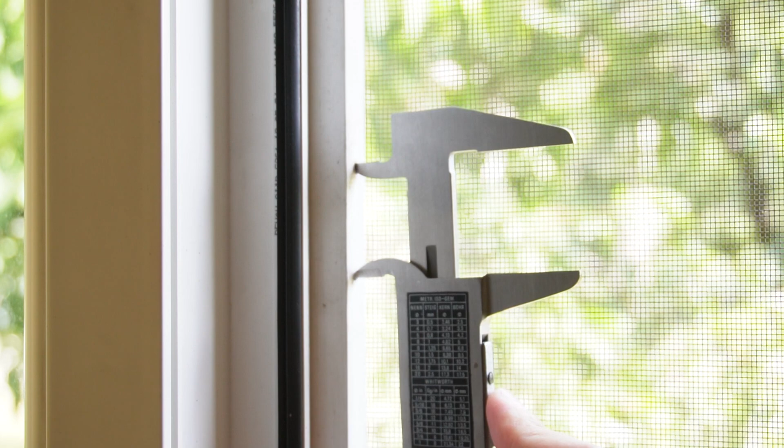First I will measure the distance from the highest to the lowest point of each hole. Next I will measure the diameter of the hole. I will make an approximate measurement for the size of the handle. I can barely see the marks where the old one has been.

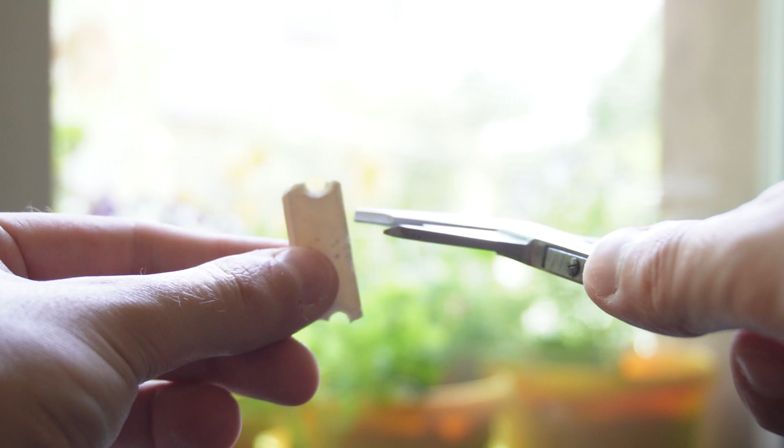Finally, I will measure the depth, or in other words, the width of the metal profile. I will use the broken piece to measure the thickness of the plastic.

Now let's open FreeCAD. Choose Part Design from the drop-down menu, then create a new document, a new body and a new sketch. I will select the XZ plane. Click on the polyline tool and make an L-shaped object as shown in the video. Try to make all sides either horizontal or vertical.

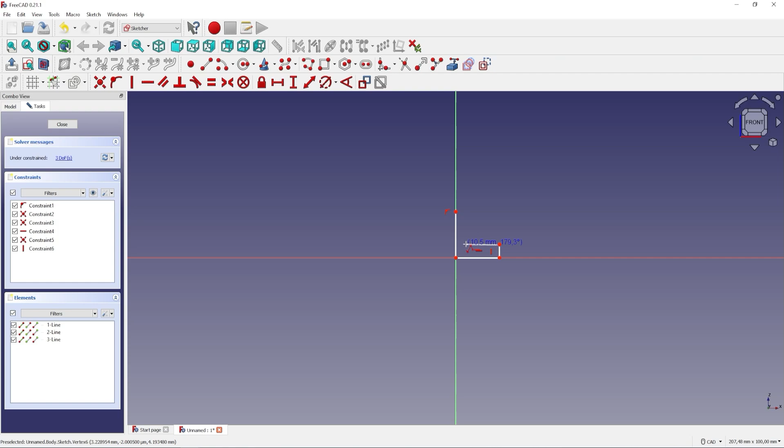I have to constrain only the top line horizontally. Now I will set the dimensions. The vertical line will be the handle and I will make it 25 mm. The horizontal line will be the side that is attached to the frame and I will set it to 18 mm.

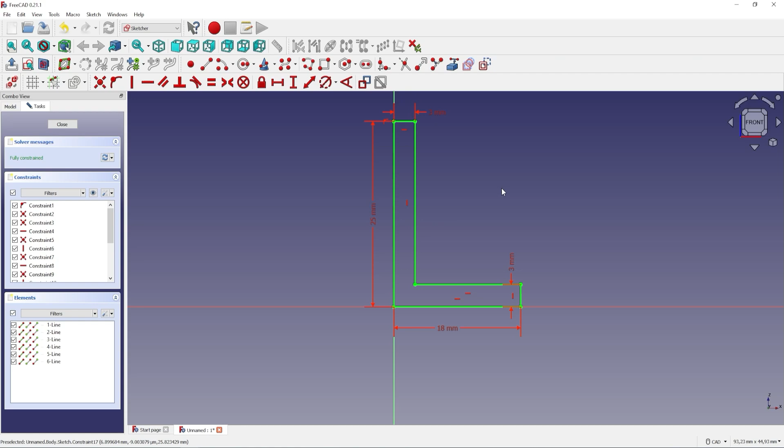I need the thickness of the handle to be 3 mm, so I have to set the other two lines to 3 mm. Now the sketch is fully constrained and I can close it. Click on Pad and set the length of the handle. In my case it should be 67 mm. Then click on OK.

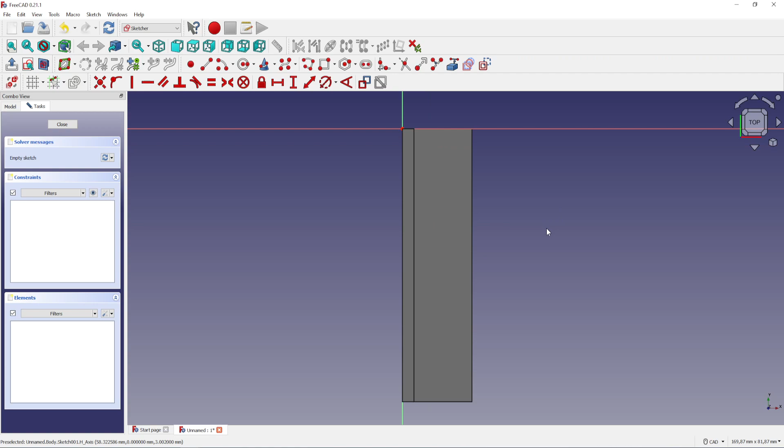Select the face that needs to have the mounting holes and create a new sketch. I will rotate it so the handle is on the left. First I will make two circles for the holes. Now I will select both circles and set their diameter to 3 mm.

I will create one point on each of the circles as shown in the video. Select the newly created points and the center points of the circles and constrain them vertically. It should look like this. This will allow me to set the vertical distance between the ends of the holes. In my case it is 37 mm.

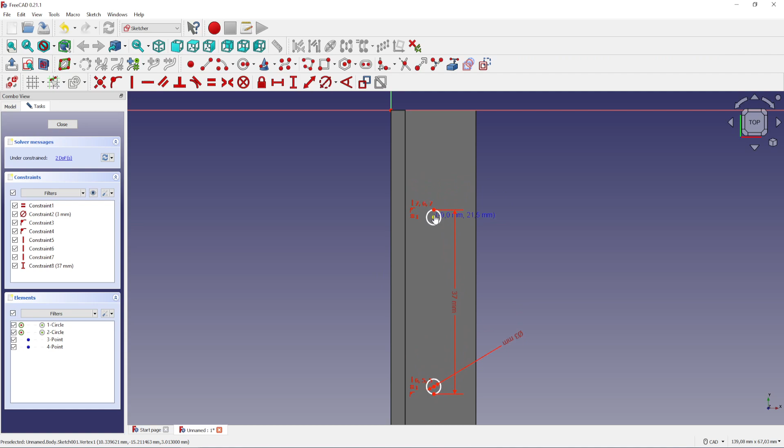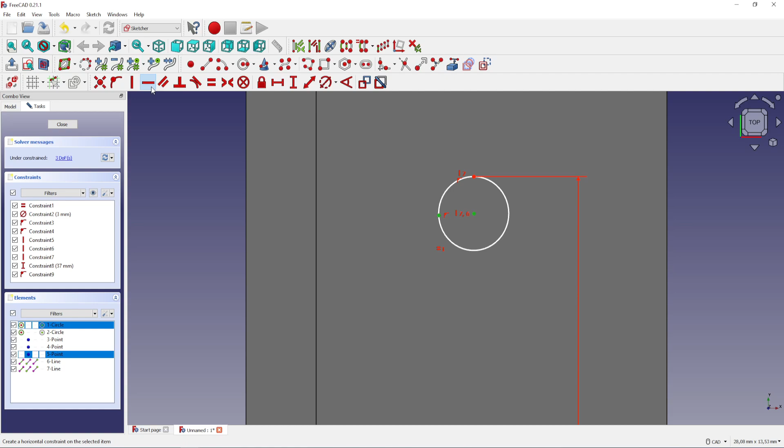Click on the external geometry button and select the top and the bottom lines of the handle. Now create another point at the left of the top circle. Select the newly created point and the center point and constrain them horizontally. Now I will be able to easily set the position of the holes from the side edge. In my case it is 10 mm.

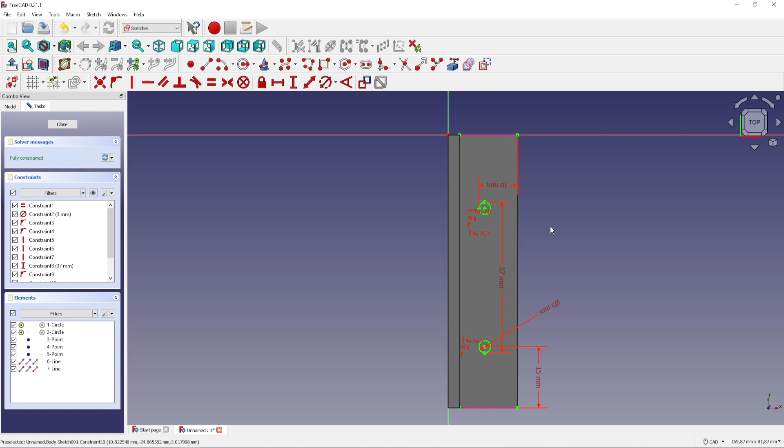Now I have to position both holes in the center of the handle. To do this, I will select the center point of the lower one and the lower right corner of the handle and I will set the distance to 15 mm. Now I will select the center point of the top circle and the upper right corner of the handle and I will check the distance. The distance is 18 mm.

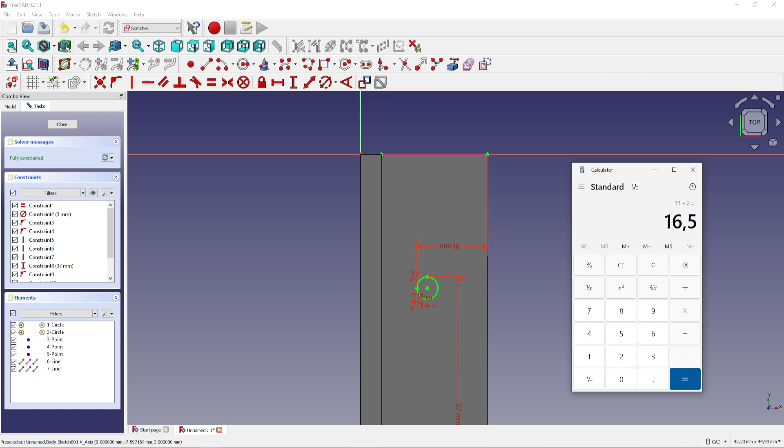Click on Cancel and open the calculator. I have to add 15 and 18. The total distance is 33 millimeters. If we divide 33 by 2, we will get the correct distance to position the holes. Now I will close the calculator and I will correct the distance. Everything is done, so I can close the sketch.

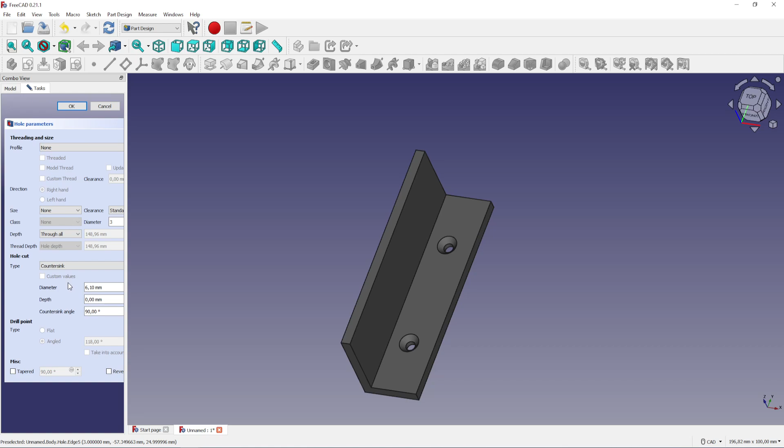Now click on the Hole button. First, set the diameter of the holes to 3 millimeters. Choose Through All from the drop-down menu. Then choose Countersink from the Type menu. Now click on OK. It should look like this.

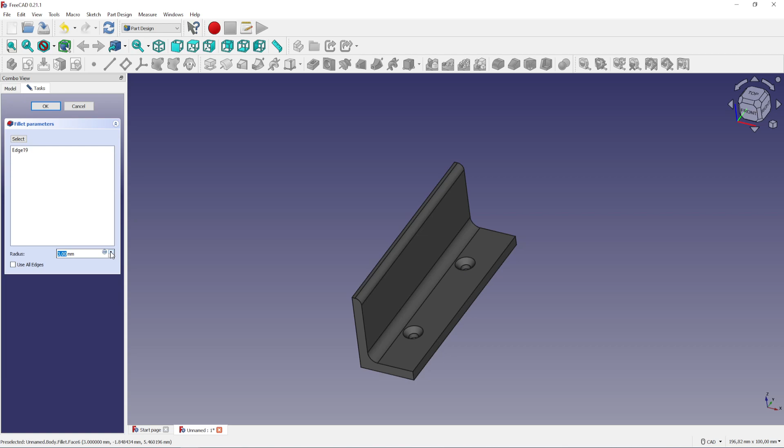Now you can select the edge of the handle and add a fillet to make it more comfortable to use. To make the angle stronger, you can select the inner edge and add a fillet as well. Now it should look like this. At this stage, you can click on the Model tab, then select the body and export the file as an .stl.

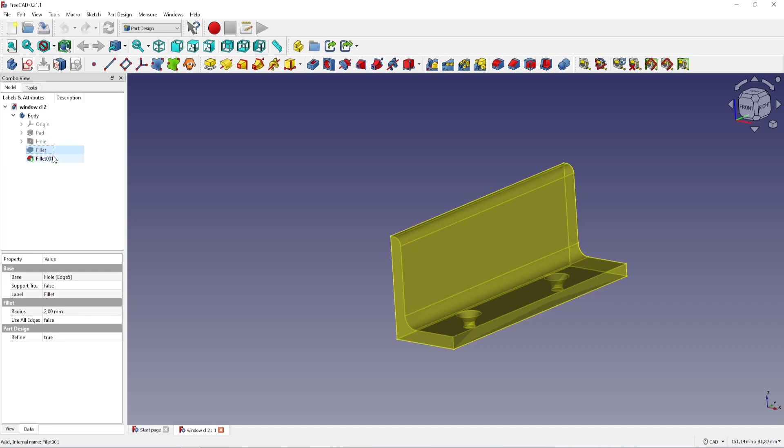This is another variation you can make. You can add the fillet to the inner edge. Then you can select the side edges of the handle. Now you can add the fillet and increase the radius to make the handle round.

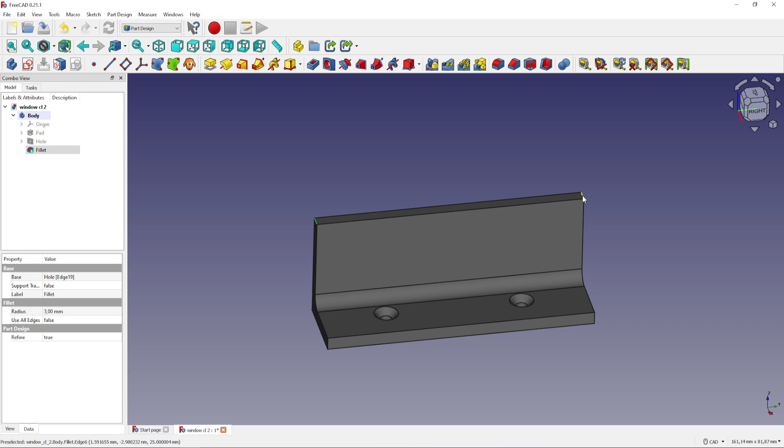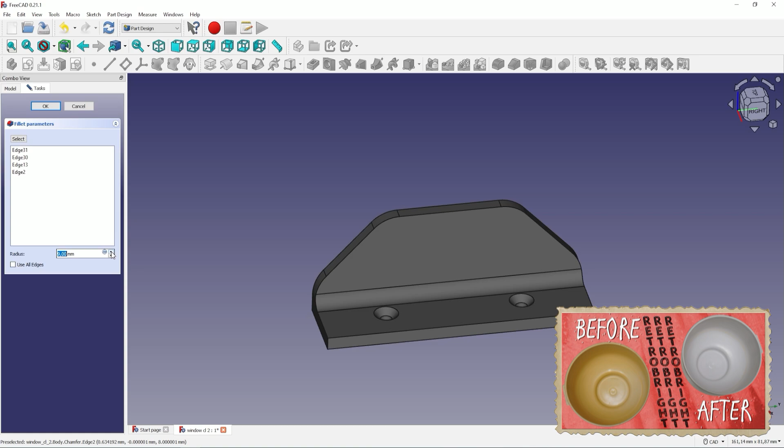Another variation can be done if you select both side edges of the handle and add a chamfer instead of a fillet. After adding the chamfer, you can select the edges again and add the fillet. You can also add fillets to the sides.

The screws are self-tapping, so you can mount the handle anywhere on the metal frame. Now let's mount the handle. This is the variation I chose to use. I printed it out of PLA just to test its durability in the outside environment. I just realized that I could have used this handle and copied the design.

I put the screws in the holes and I checked if they will match them. Now I will tighten the screws. I'm happy that I was able to fix one more thing in my home.